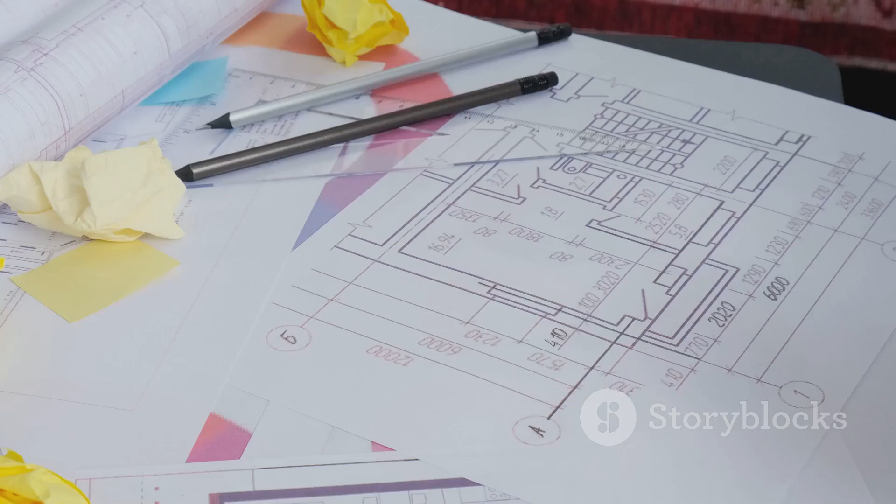Architecture at its core is the art of shaping space. It's about creating structures that are both functional and aesthetically pleasing. Architects rely on point, line, plane, and volume. These elements are the building blocks of design. Understanding them is key to appreciating architectural creations. They interact and influence each other, and this interplay gives rise to the diversity in architecture. From skyscrapers to homes, these elements shape our experiences.

In the vastness of space, a point stands out as a singular entity. It is the most basic element of design, representing a position in space with no dimension. Don't underestimate its simplicity, though. In architecture, a point holds significant symbolic and functional power.

Imagine a tall spire piercing the sky. That pointed tip reaching towards the heavens acts as a visual anchor, drawing the eye upwards. It becomes a symbol of aspiration, of reaching for something beyond the mundane. This concept can be seen in countless examples, from the pyramids of ancient Egypt to the Gothic cathedrals of Europe.

Points aren't just about symbolism. They can also serve practical purposes. Consider a skylight, for instance. That strategically placed point in the ceiling allows natural light to flood the interior, transforming the ambience of a space. The Oculus in New York City is another striking example, where a point in the ceiling becomes a source of light and a focal point for the entire structure.

If a point marks a position, a line charts a course. In architecture, lines define space, create order, and guide movement. They come in various forms, each with unique characteristics. Straight lines evoke stability and strength. Curved lines introduce fluidity and grace. Diagonal lines inject dynamism and movement. Lines are the threads that weave the fabric of architecture.

Planes shaping space and defining boundaries. While lines exist in one dimension, planes expand into two. They are formed by the extension of a line in a direction other than its own length. In essence, a plane is a flat, two-dimensional surface. In architecture, planes are the building blocks of walls, floors, ceilings, and facades.

Walls, for instance, are essentially vertical planes that enclose space, providing shelter and privacy. Floors, the horizontal planes we walk on, define the base of a structure and dictate the flow of movement within. Ceilings, the planes above, create a sense of enclosure and often feature decorative elements.

Facades, the exterior faces of buildings, are perhaps the most expressive use of planes in architecture. They act as a canvas for architects to showcase their creativity, using different materials, textures, and patterns to create visual interest. From the intricate carvings on Gothic cathedrals to the sleek glass facades of modern skyscrapers, facades shape our perception of a building and its relationship to the surrounding environment.

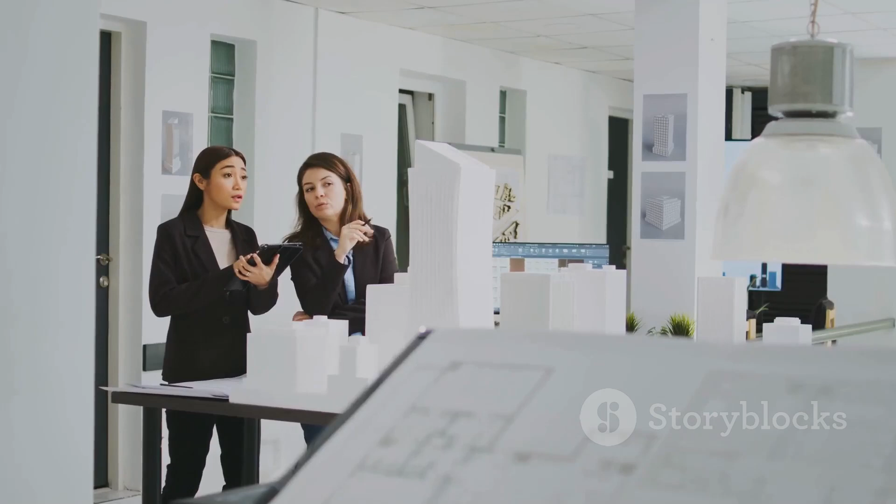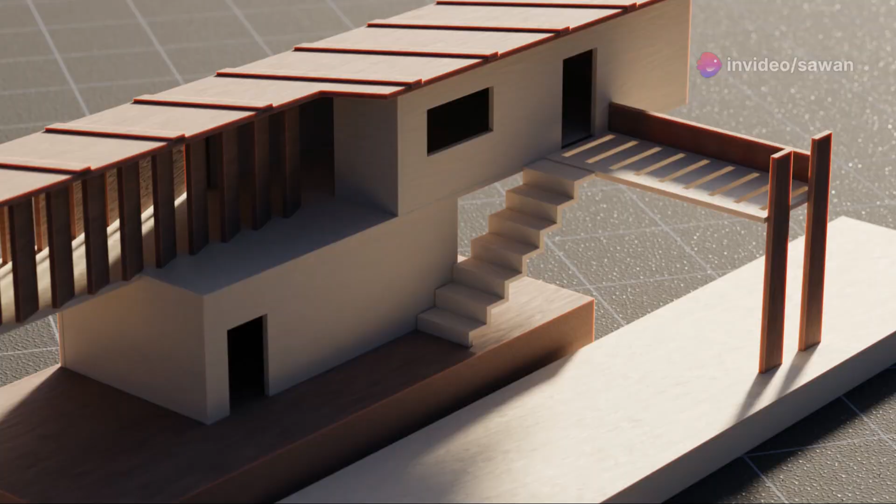Volume, the realm of experience. When planes come together to enclose space, they give birth to volume. Volume is the three-dimensional manifestation of architectural design. It's the result of the interplay between point, line, and plane. Think of a simple house. The walls, floor, and roof create the volume of the living space. This is where life unfolds and memories are made. From grand cathedrals to cozy corners, volume makes architecture inhabitable. The manipulation of volume is key in architectural design.

Conclusion: the symphony of elements. From the pinpoint precision of a spire to the expansive volume of a stadium, the fundamental elements of design work in harmony to create the diverse and captivating world of architecture. Understanding these elements and how they interact allows us to appreciate the thought, creativity, and technical skill that goes into shaping our built environment.

Points, lines, planes, and volumes are not merely abstract concepts. They are the tools with which architects translate their vision into reality. They are the building blocks of our cities, our homes, and all the spaces in between. By understanding their language, we can begin to decipher the stories that buildings tell and appreciate the profound impact they have on our lives.